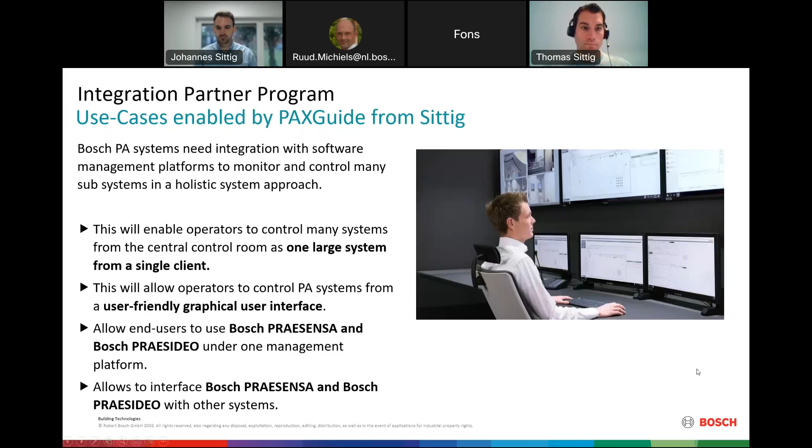So let's start with what is our PAXguide system, or what it enables in combination with the PRAESENSA. First of all, it allows you to control one large system from one single client. It allows the end user to combine PRAESENSA and PRAESIDEO systems under one management platform, and gives you, beside that, a user-friendly graphical user interface, a holistic audio management platform on top. Furthermore, it allows you to integrate the PRAESENSA and PRAESIDEO system to other top-level systems like operation control center software, etc.

Some information a little bit about us. Company Sittig, we are a family business in the second generation, 35 years on top. I'm here with Thomas Sittig, he's the technical lead, he took over the company 10 years ago. Now we are about 40 employees at our 4 locations. Main base is in Frankfurt, but we also have offices in Munich, Slovakia, and Chicago. Our customer base is spread around the world, as you'll see on the next slide.

But what are the solutions that we are doing? On one hand, in terms of audio, we are delivering automatic announcement systems, especially for airport and railway networks. And especially for industrial plants, we deliver audio management platforms, such as the PAXguide system we are presenting today, which enables you to interconnect different PA systems. Beside that, we also have special alarm software, emergency intercom systems, as well as IT services in our portfolio.

Taking a brief look at our customer base, Germany is our home market. This is where we grew in the last years. Every major German airport is using our audio management platform to make their announcements, to automate their announcements, and also to manage different PA systems.

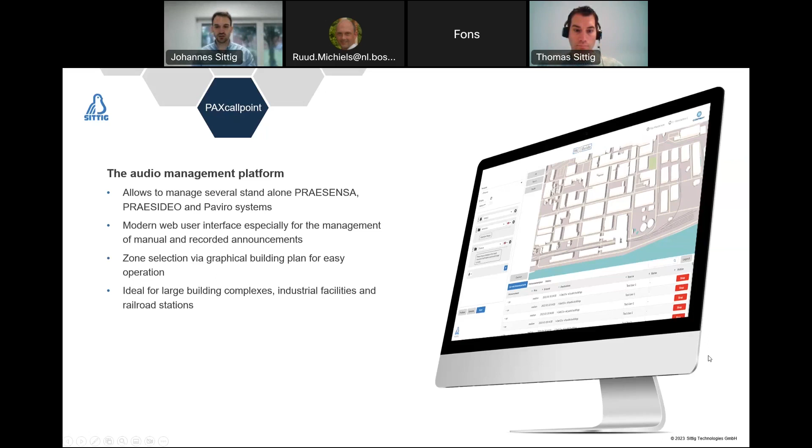You're able to do manual announcements using the call point. You can also do time control, so scheduled announcements, and there is no limitation in how many scheduled announcements or how you want to schedule them. Since it's database driven on our end, the possibilities are kind of unlimited.

Playout of different announcements, so uploaded WAV files, pre-recorded messages. The user is able to see an announcement history. He can also pre-listen to the announcement at his workstation, at his PC loudspeakers for example, or if he has a paging station from us right next to him, he can listen on that.

The zone selection was already mentioned. He also sees all the running calls throughout the whole system at this time, and can especially see system faults, not only from our system if there's a network error, but also from a PRAESIDEO or PRAESENSA system, for example. So that can also be displayed on the system.

Then we have some additional features that can also be embedded into the solution. So text-to-speech, for example, or if you have a pretty huge infrastructure and want to use different maps, we have a multi-layer map feature available, as well as automatic announcement functionalities interconnecting with different databases, and a SIP interface.

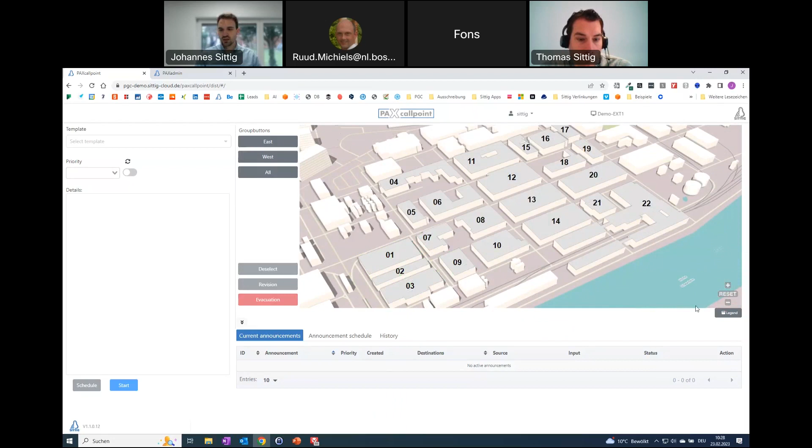Coming into the call point, as we see here, we have the map of an industrial facility with several different buildings. The user sees the map and can select the different zones or buildings to make announcements or calls. Beside that, if I open up the legend, as mentioned earlier, he sees also if there are calls running at the moment, or if there is a system error or network error, which is normally more on our side, and also announcement while error, for example.

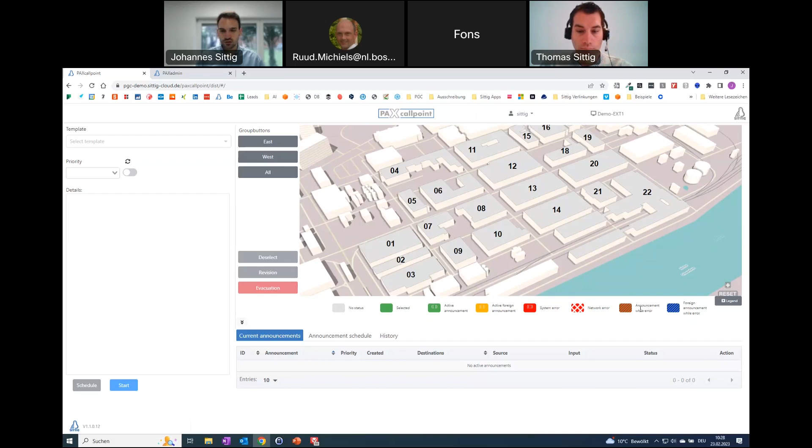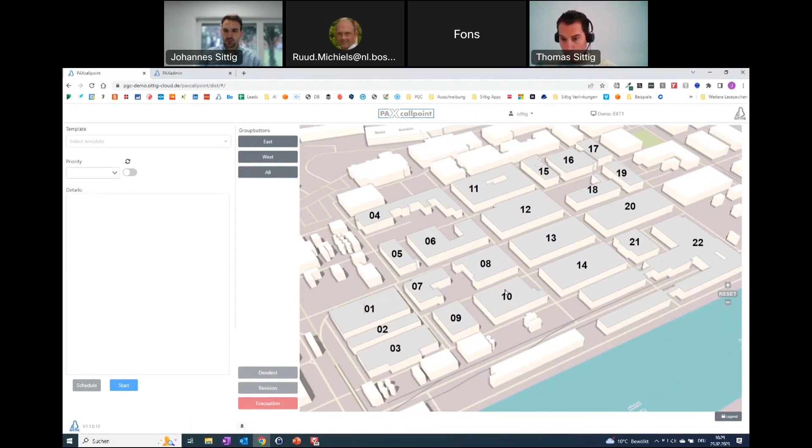This can also be configured - what kind of errors the customer can or shall see, for example. And we have this here. You can also expand the map, for example, sometimes helpful so you don't see the lower part. You can also use it on a tablet, for example.

We have here on the left-hand side some group buttons. These can be configured easily by you or the customer in the PAXadmin. So, for example, all the buildings on the east side of the industrial plant, or on the western side, or just all of them. This can also be easily configured by the customer itself.

On the lower part we can see different tabs. So we see here the current announcement - currently there's no announcement running, you can see it here. Then we have, you can also stop them here.

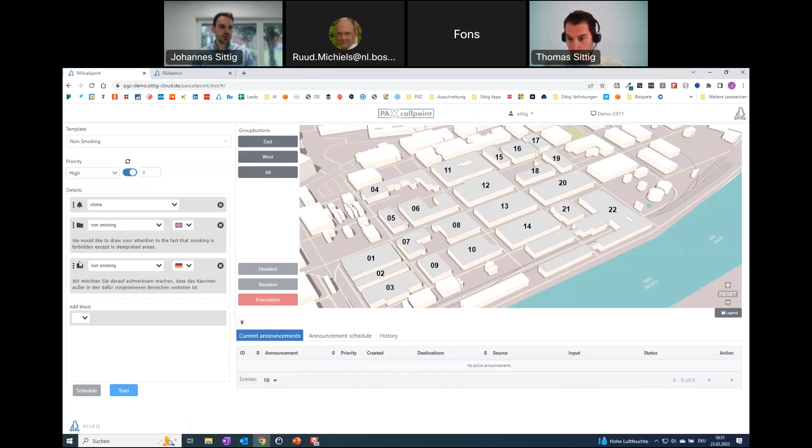And then he could just say, for example, okay, I'm going to play it out on all those zones. And then he can just click the start button and play out the announcement. As you see, the announcements are blinking.

On the lower part here, you also see the announcement is running. You see the source where it's coming from, and you see the status. Also, if there is a problem, for example, you could also stop the announcement.

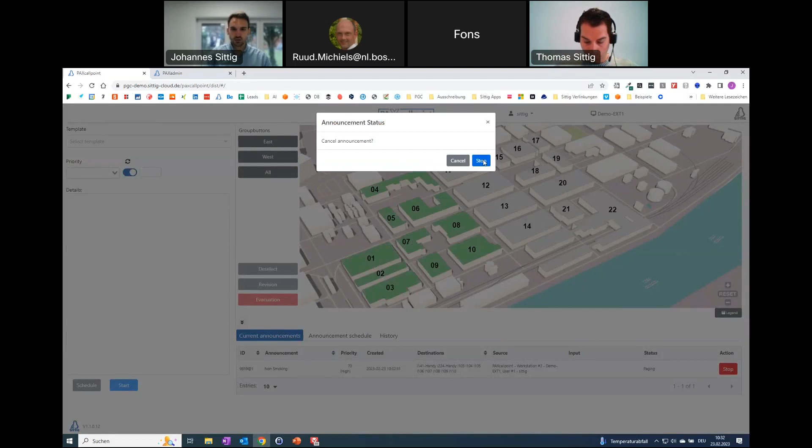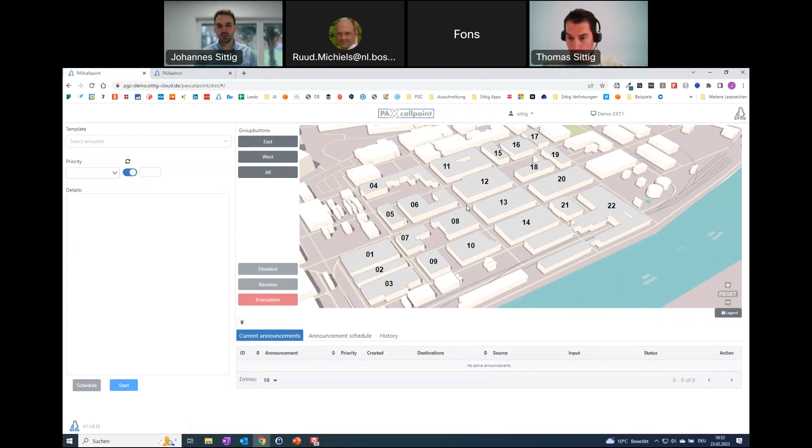If an announcement is played out from a different workstation, it can also be a PRAESENSA paging station, or someone else using the GUI on a different workstation. You also see the calls running here, but they will be set in a different color.

They will be displayed in yellow, so the operator knows this is currently played out from a different workstation. To set up a scheduler, let's stay here with the example. The non-smoking announcement is always a pretty good example for this. You can just click here on schedule, and then we have different options.

Either he wants to play it out only as a one-time announcement, on one specific timestamp, or we can set up here a recurring announcement. So this recurring announcement will start now for the next year. And then I can say, for example, I can either do it time-based or interval-based.

Starting off now with an interval, I'm saying, for example, this announcement should always be played out from 8 a.m. in the morning to 4 p.m. in the afternoon. It should be played out every hour, but I only want it played out on Monday, Tuesday, Wednesday, Thursday, and Friday, so not on the weekends.

This could be saved, or I could also combine it, for example. So maybe I will have a different execution time for the weekends. I could say for Saturday and Sunday, I want it played out always from 1 p.m. to midnight, but every 30 minutes. So you can also combine different schedulers at once, which makes it easier for you in the end to have an overview about your schedulers, to make changes, etc.

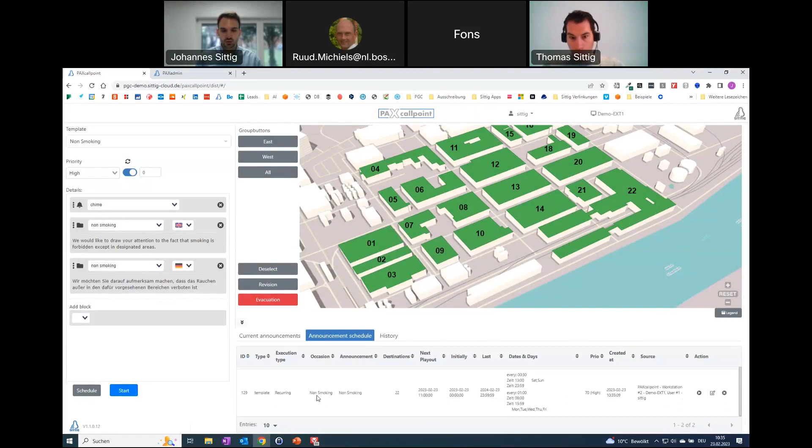This can easily be saved by the operator, and then you see here at the announcement schedule what we have just set up is the non-smoking announcement. You see when it's always going to be played out, when is the next play out, when was the first, for example, or the last one.

But you also have the possibility to edit it here with all the changes you have done. Beside that, for example, you could also say you want this announcement to always be played out on Mondays, Tuesdays, Wednesdays at 10:35, for example.

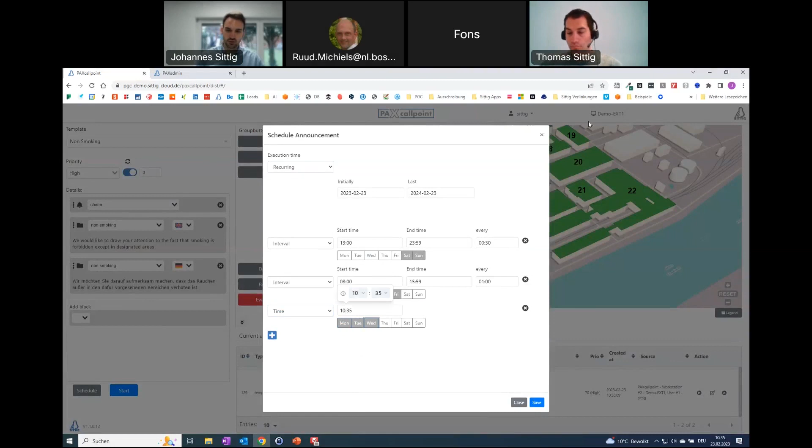So far on the call point part, I will show you now how easy it is to set up new announcements and also to make changes on the system in the configuration part. So if we are going into the PAXadmin, then we have here the same part as well, just needing my credentials.

So the PAXadmin here is the administration application. You have a variety of examples on what you can set up in the system. I will just show a few, otherwise it would expand the time.

Starting here off with the user management, for example, it's pretty extensive. We are working here with users and roles, and you can give users, as I mentioned, everything that you see in the application can be allowed or disallowed. So, for example, I could give the role all access to all functionalities at a call point, or just only, for example, that this user is able to trigger a template.

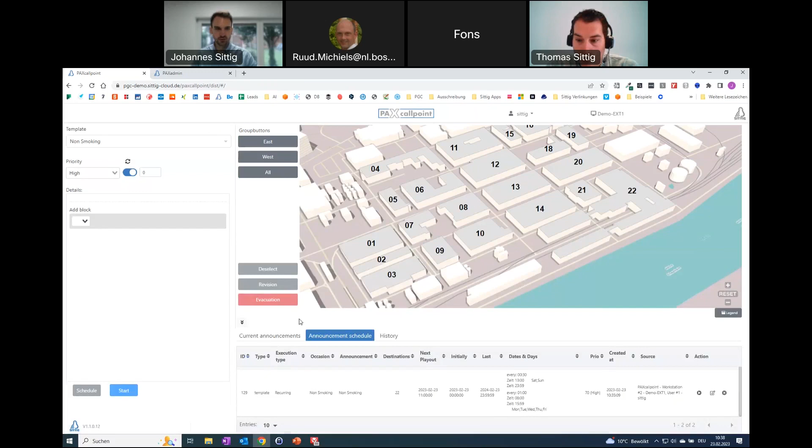Coming here to the announcement part, showing it on a practical example, we are making here now a new category, for example, calling it Bosch, making it available in the system. And then the operator, if he has the user rights, he would also see the changes directly.

So we see here we have the new category. There's nothing in it yet because we haven't generated an announcement. That's what we are going to do now.

So we are going to the template part. There we also see all our other templates, for example the non-smoking part. And then we can generate here a new template.

On the right-hand side, we can upload or generate new announcement blocks. So we are making now this block generating. Either we could upload something as a WAV file, we could also use a paging station - we can't see this option here right now because I don't have a paging station right next to me - or we can generate it using text-to-speech. This is what we are going to do now.

Text-to-speech here, we are using different external text-to-speech providers that are implemented in the software. So for example, we have Microsoft Azure or Amazon Polly as online solutions, but we also have offline solutions that will be locally installed on the server, especially for evacuation purposes.

So here we can choose which language it should be, what voice it should be. Taking it English here: this is a test. And then maybe I also want to save it in German, saying 'dies ist ein Test', or 'das ist ein Test'.

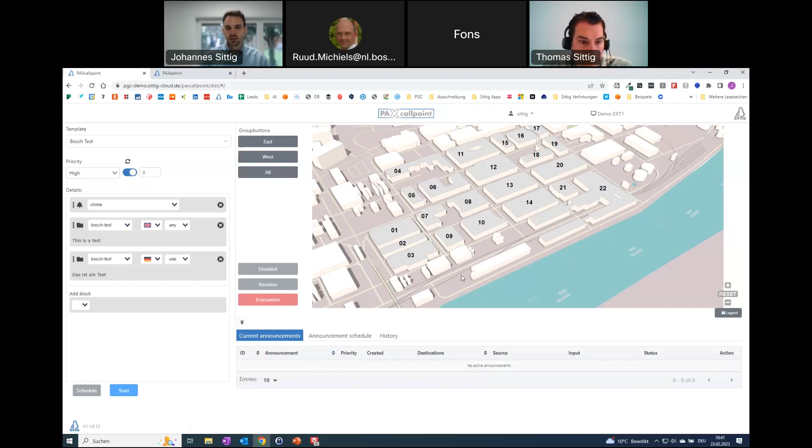Not available here in my demo system since it's in the cloud, not connected to my workstation, but normally you could also pre-listen to it. And now he can just use a template, choose a zone, or maybe just two buildings where he wants to play it out, and then just start the announcement.

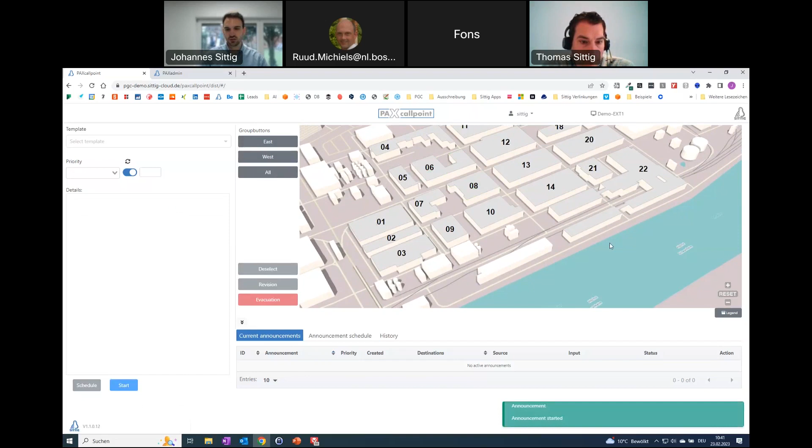So this is very easy for the operators in the end to manage this whole announcement topic: generating new announcements, uploading new files, he always has a possibility. So here for example, we see all the announcement blocks that are available in the system, which can be easily updated, new ones changed, etc.

One more thing I want to show you is how we are doing it, because I just saw the message that text-to-speech is not working with live messages using the paging station at the moment. We have the feature in plan - we are working on it at the moment - speech to text and then text to speech, but there would always be a delay, so it would not be in the same second. Currently it's not available yet.

Coming in here to the area zones PA IDs - this is what we call it so far. So PA IDs is for us the lowest part we are getting from the PRAESENSA or PRAESIDEO system. It can be one speaker line, can be several speaker lines, etc. It's pretty easy: in the beginning, when we set up the system, we do the configuration, load the configuration from the PRAESENSA or PRAESIDEO system.

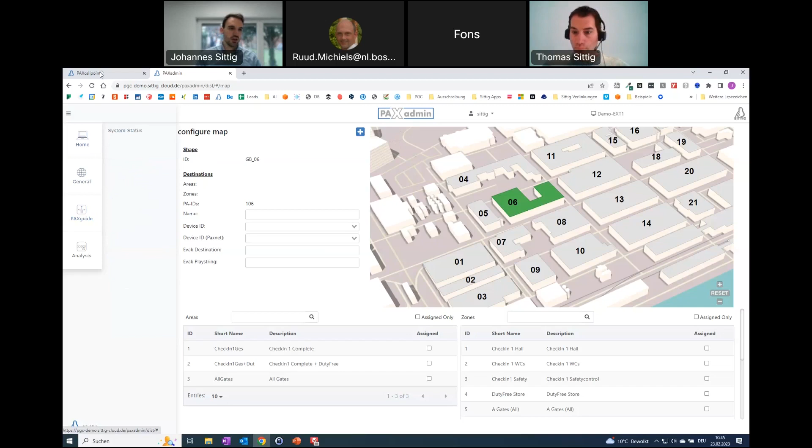I also saw a message about pre-listen. You can use every speaker line for pre-listen purposes. So, for example, if you have a loudspeaker in the operations room, you could use this speaker line. What we do for demo purposes pretty often is connect our phone via a SIP interface to it. So if I make a call here in this building, you will see that my phone is ringing and calling me with the message I've just created. So it's very flexible.

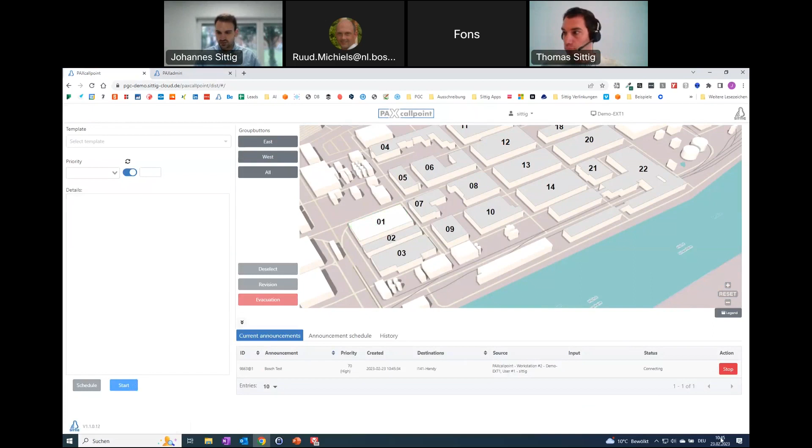Great. I think, Thomas, did I forget anything? You have a lot of analysis tools in the administration part as well - extensive history, statistics, etc. A lot of stuff in here. But as I mentioned, I think this would take too much time to look at everywhere now. But Thomas, did I miss anything important? Forgot anything? No, I don't think so.

I think we go more for the questions, but one important part is to explain that the whole system is all the time supervised - all kinds of ports, all kinds of streaming, and so on. So if you go to the overview of the system, and how it could be interconnected - this is important to understand, because a lot of times our system runs in the network environment of the customer, not in our own environment, running in the customer's environment on different routers, different subnets, and so on. So all the time we are controlling all kinds of communication ports.

This means not only the communication from our server to the PRAESENSA or PRAESIDEO, but we are also routing all UDP, multicast or unicast ports which you are using for streaming or Dante. We are routing constantly from our server to the PAX controller and to the Bosch PRAESENSA and looping it back to us, checking if a pilot tone comes on. So we can be sure if someone changed something in the firewall, that you find out that, for example, multicast streaming is not possible anymore in your network, or unicast is not possible because someone changed something in the network. So it's fully supervised the complete day.

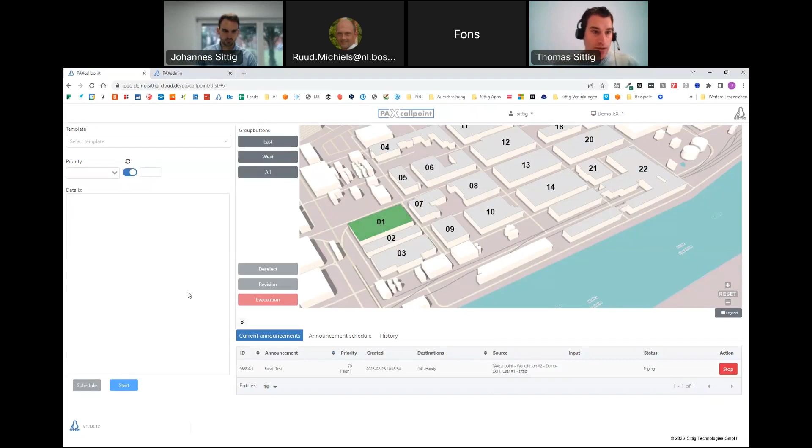Cybersecurity is a big part of our software. As Johannes mentioned, we run mainly in airport environments, so all of this is more or less developed on the newest technologies based on ISO 27001, as well as being KRITIS proofed in some airports at the moment. So yeah, we do our best to make it as secure as possible.

I will start with the questions that came in first. Also, if you have answered some of them already, that's fine, so everyone has heard the answers. It might be a little bit mixed now from the topics, but starting here now.

So, do you support all versions of PRAESIDEO controllers? In general, yes, but it is important that the firmware itself is not too old, so otherwise this needs to be checked, and individually, if all open interface options are available. So this has to be checked in the beginning.

Also here the question, who is the point of contact for design and pricing for this integration? This is Sittig, so you can directly contact us. You also do not have to ask for permission to contact us directly - he will be in the loop from our end anyways. So you can directly contact us. We do the design and the pricing together with you.

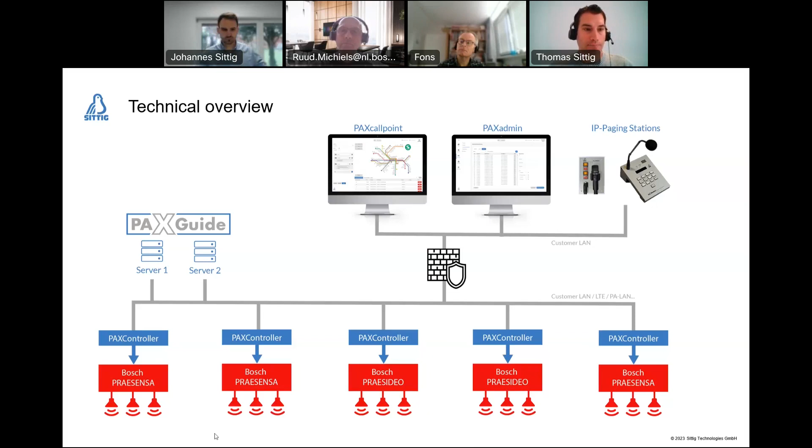Also in the PAXadmin, you see in the history all failures from all systems, like a complete log from a logging viewer—not just for PRAESIDEO or PRAESENSA, but for all connected systems, we are collecting them in our database. As we are using the same interface as the logging viewer, we have more or less all the same information.

As you can also see here in the call point, we are also checking the local calls which are running, for example, on local paging panels. These are also mapped to our system. So in our announcement history and so on, you also have all calls running on the local level, which we store in our management platform on top as one big log where you can see all calls going through the system. It doesn't matter if it runs on a local PRAESENSA or local PRAESIDEO, they are all mapped to the top level and stored in a big database there.

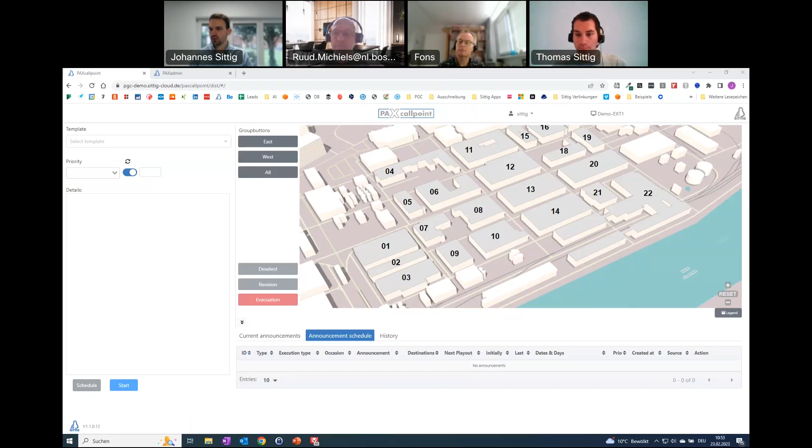Then we had the question whether the PC call station or the PAXcallpoint could call to PRAESIDEO and PRAESENSA into one GUI.

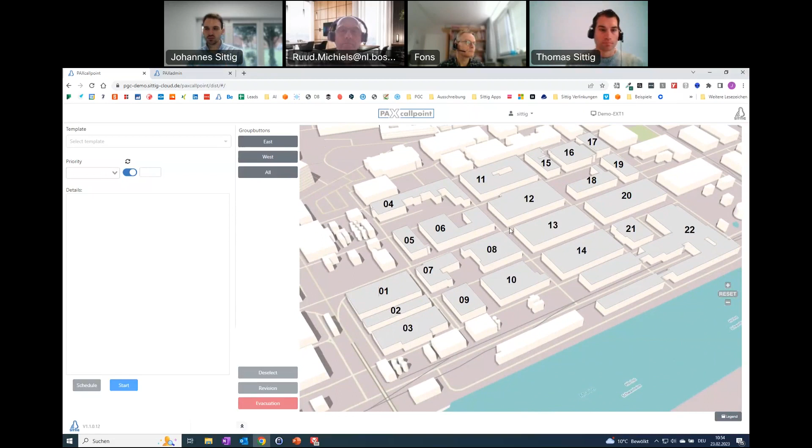Yes, exactly. So what you see here on the map could be a lot of different PRAESENSA and PRAESIDEO systems below. For example, this building here could be a PRAESENSA system, and this building here could be a PRAESIDEO system—kind of what we did in Basel for Roche, for example. They have pretty small PRAESENSA subsystems, I think 60 in total, for just 1 or 2 buildings there, and we just interconnected them so the user can use it.

There could also be a mix-up—for example, some older systems just connecting via analog audio and contacts, in parallel to a PRAESIDEO and PRAESENSA system, as well as, for example, building number 1 having a SIP integration or something like this. What we also do pretty often is if the customer is building a new PRAESENSA system but has an old PRAESIDEO system, they just build the new rack with the PRAESENSA beside the PRAESIDEO.

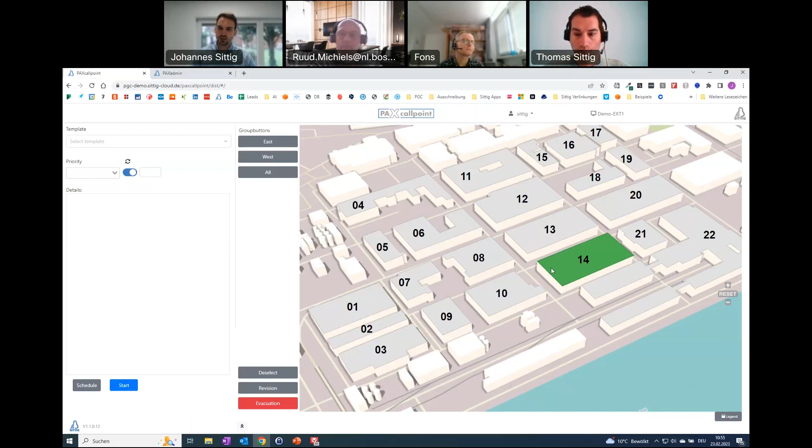We are interconnecting to the old PRAESIDEO system as well. So for example, here in building 14 could be a PRAESIDEO system, and they're changing it now to PRAESENSA, like with all the other buildings, but over a time frame of maybe 10 years or so. So we are connecting to the old system. They are building the new system beside it, and we are just plugging into the new system once it's set up, and that makes it very smooth to make the change of the whole system. And as Thomas mentioned, this could also be some other PA system, whatever. Sometimes they have some old system somewhere else they do not want to replace or anything else. This gives you also the possibility to add those systems into this application as well.

There comes one question from Fazil about the PRAESIDEO old and latest. Like Johannes said before, the problem is not the controller itself. The problem is sometimes if the firmware is too old. It's because the open interface which you are using to connect to the PRAESIDEO or PRAESENSA system also has had some changes in the past, and especially very old PRAESIDEO firmwares have some issues in the open interface. So in general, if this is very necessary, where you cannot update the firmware, we can also check, but then we need to know exactly what kind of firmware you have running there, and we need to check if there are any kind of problems. Maybe there could also be some special software for it, where we exclude or include some options which are not possible for your controller. But you cannot say it can run with all kinds of controllers and all kinds of firmwares. It's more or less that we need to check individually if this will work or if this will produce some errors.